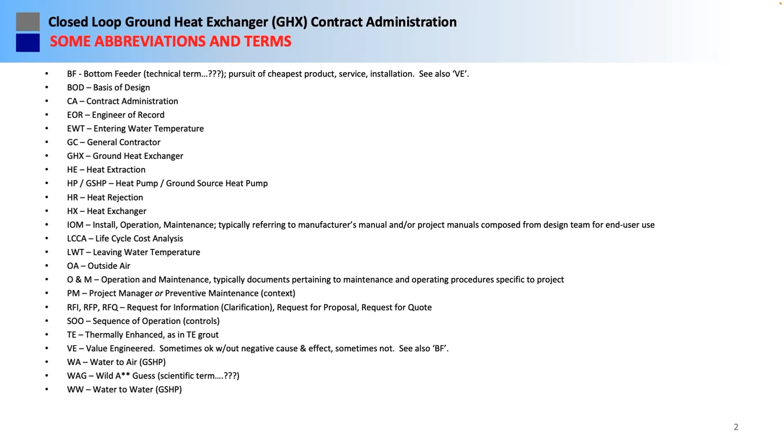So contract administration, what is it? Well, it's really quality assurance to make sure that what is designed goes in as intended. What we've found in the industry, especially as ground source is growing, especially on commercial projects, we have a lot of situations that become problematic that could have been avoided.

By some on-site quality assurance or contract administration by the person who designed the system to begin with. So a couple of key points: CA, make sure that the design, the basis of design, is honored. The industry standards for the construction methods and procedures are adhered to. Quality control procedures are followed to verify system integrity, and that includes things like pressure testing, verifying things have been purged of air, that sort of thing. And the quality of the construction documentation, that is the plans and specs, is really the key for this, and it's also the benchmark for future reference needs, should someone need to get in and put in a utility or something over a loop field.

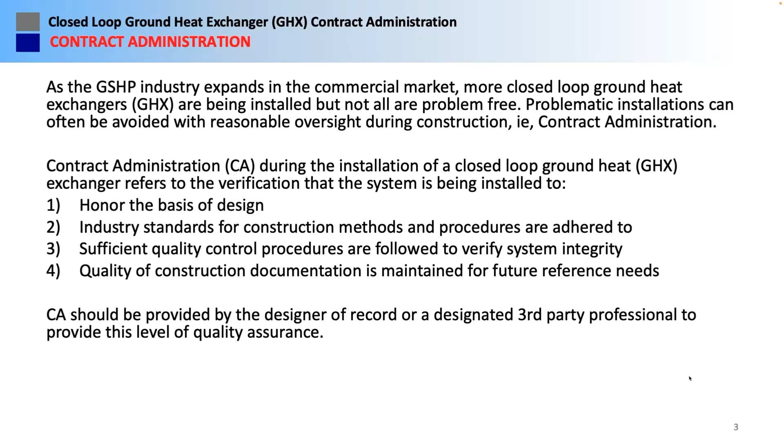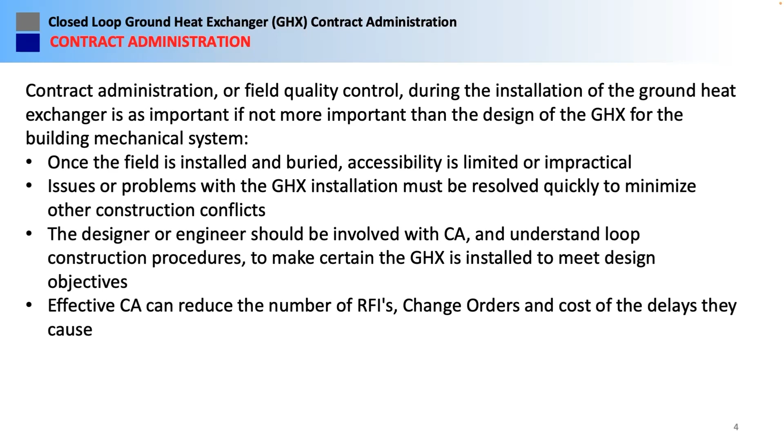So once the field is installed and buried, you're not going to get to it again. CA allows for problems to be resolved quickly during construction, to not compete with other projects or other processes and slow them down. And finally, what effective contract administration can do is reduce the number of requests for information, change orders, and delay in construction.

Just some learning objectives, I'll let you guys just read through those real quickly, and I'll just kind of highlight some things here. It really is part of the design and construction process. It's where design meets construction, and makes sure that things are what is expected for the installation. Also, CA gets the designer involved with the construction team personally, so direct communications become easier. A lot of times people start installing a system, they never know who designed it, and it's some disembodied entity out there, and that human contact is lost. Accordingly, that communication can be bad, or lack of communication can hurt the project.

One of the things that I'm pretty adamant about is doing a pre-construction meeting with all the parties involved to make sure everyone understands things, that we go over the submittals, everyone's on the same page.

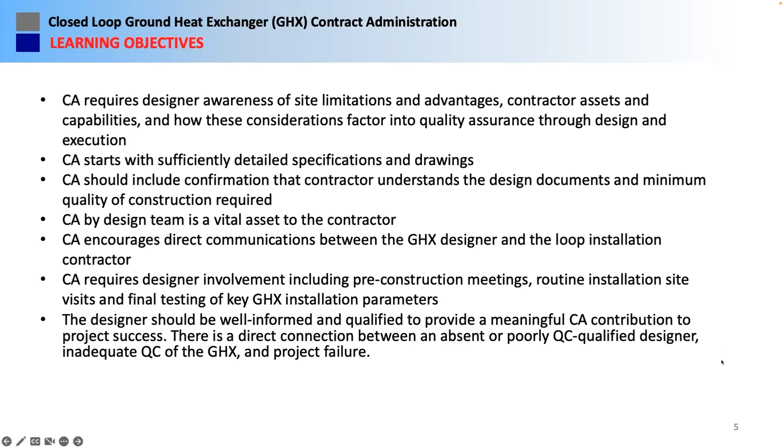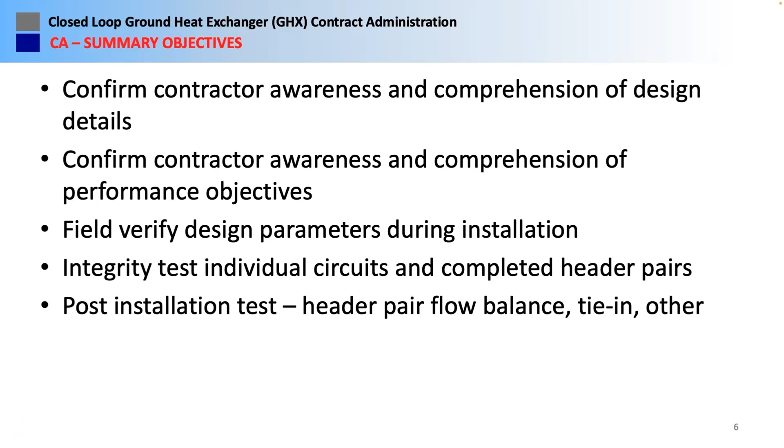CA objectives: confirm contractor awareness and comprehension of design details, confirm contractor awareness and comprehension of the performance we're expecting out of the system, verify design parameters are followed and understood. We really stress integrity testing of the system, and we'll also want to do post-installation tests such as header pair flow balance tie-in and communication with the above ground part of the system.

So the next slide, that's the ultimate objective of contract administration. We don't want train wrecks.

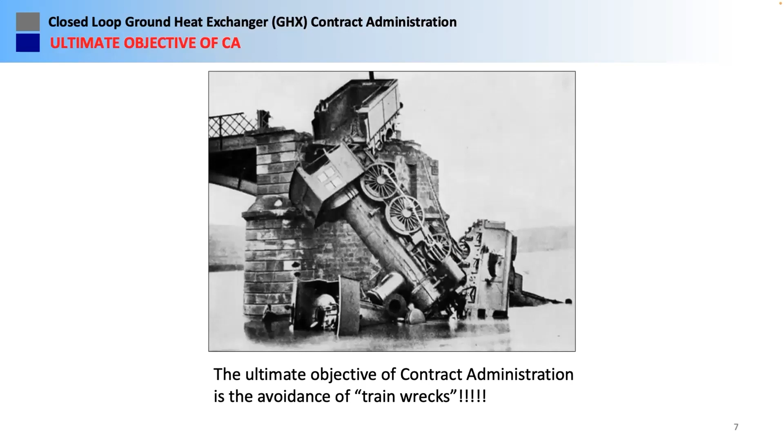So closed loop heat exchangers, what kind are there? Well, there's surface water heat exchangers, which can be a polyethylene coiled loop field or a stainless steel plate heat exchanger. That's one type of closed loop system.

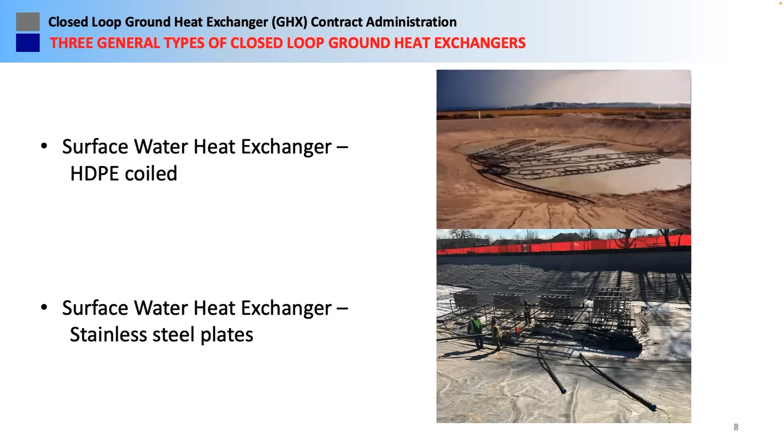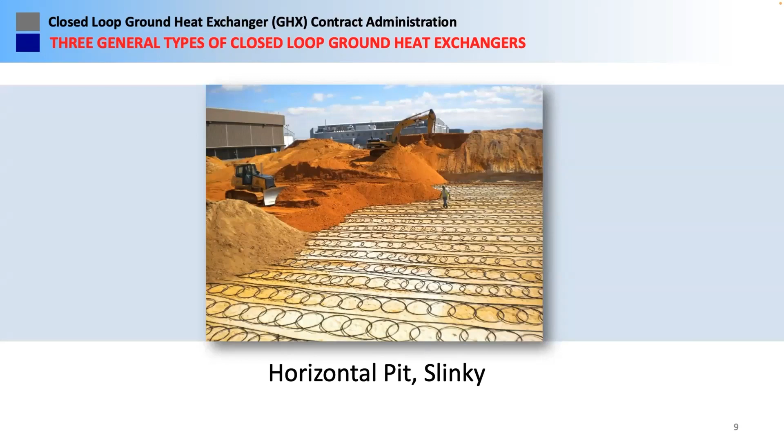A horizontal can be a straight line ground loop or a slinky excavated pit. And you can also do a horizontal trench system.

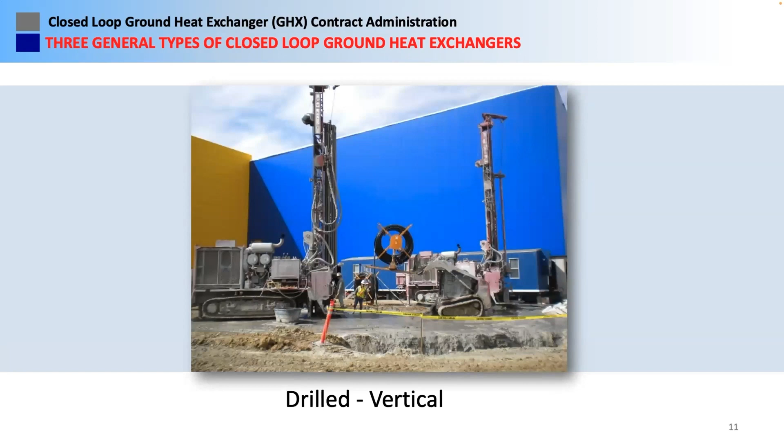And finally, vertical, which is probably the most common, particularly for commercial.

We do the occasional, as an industry, horizontally drilled ground loops. They sometimes are the best tool in the toolbox for sites where, for whatever reason, you can't drill a vertical loop, you can't do a big excavated pit system. So it's just another tool in the toolbox to get the job done.

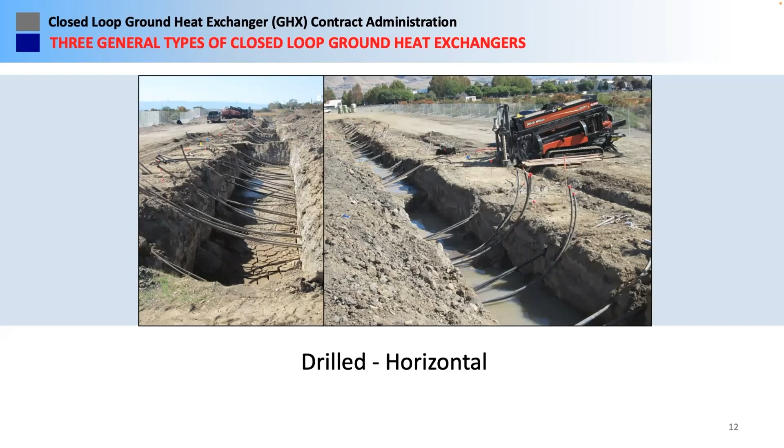And due to the time constraints, we're going to focus on vertical loops, but some of the things we're going to cover apply to other types of closed loop heat exchanger systems.

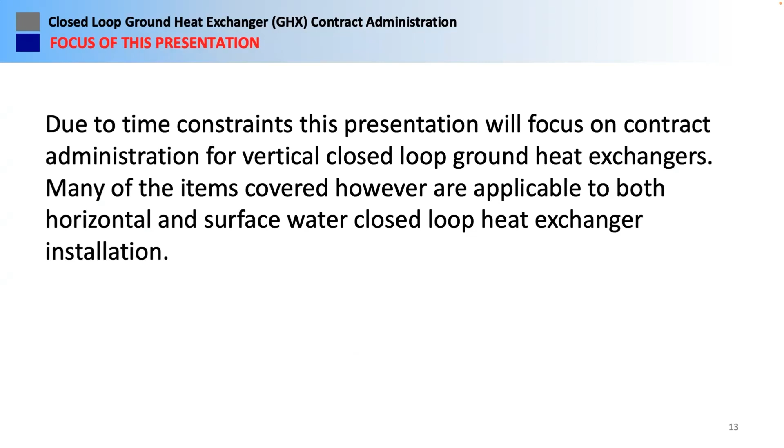So where does CA start? Starts with the design. As a designer, you need to be aware of what contractor assets can do. You don't want to design a system that can't be done. You've got to honor presiding regulatory requirements. Your drawings and specifications have to be sufficiently detailed that people can understand them and execute them. They're also a benchmark for later quality assurance during the installation.

Specifications and worksheets are necessary for good as-built documentation: drill logs, grout testing, progress testing schedule, etc. These all go into the job book, and one thing it does for the contractor, if he does all of these things, it also protects him from a liability standpoint. For example, if there's a problem later, did you do this? Well, yeah, if you've got documentation, that helps you out.

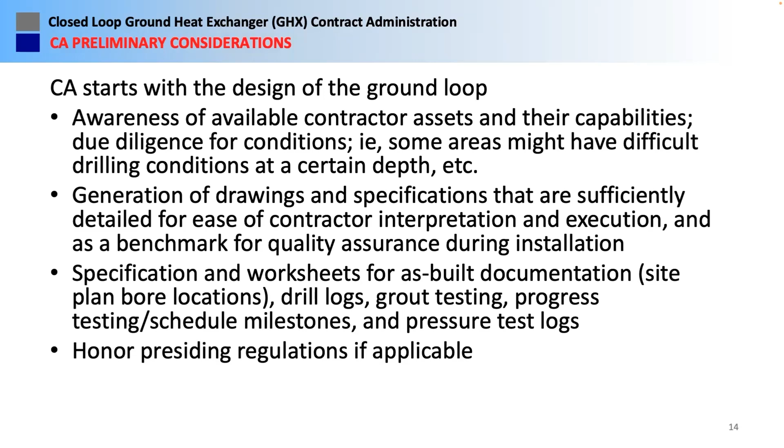So this is just kind of some of the variables that have to be considered during design, and it also flows into your contract administration. So while things are not really complex, there's a lot of components that have to come together to do your design and then execute your drawings and specifications for CA later on.

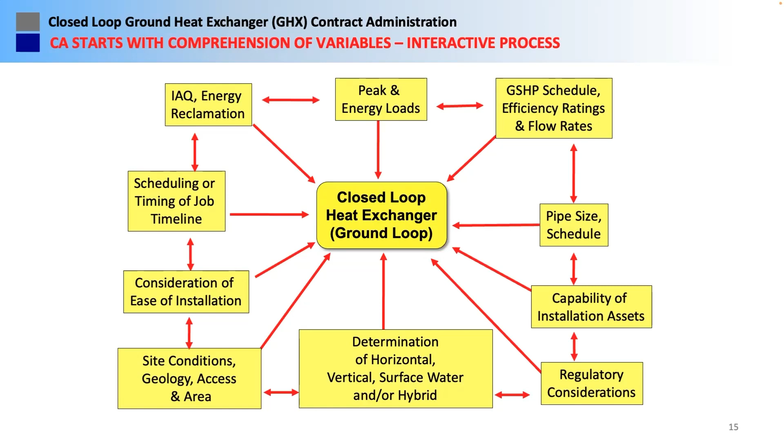Pre-construction meeting, that's where everything starts off. This is after you've done the submittal review. You look over your pipe, fittings, warranties, the grout type, verify licensing, certifications, fusion endorsements, that sort of thing. Go over the type of testing and integrity requirements such as purging, water treatment, that sort of thing.

I don't know, Jeff, if you can click on that submittal checklist, if that'll pop up or not. If it doesn't, I'll be more than happy to share that later. But yeah, what I've done, yeah, no, won't work. Yeah, we won't worry about it. What it is, I've...

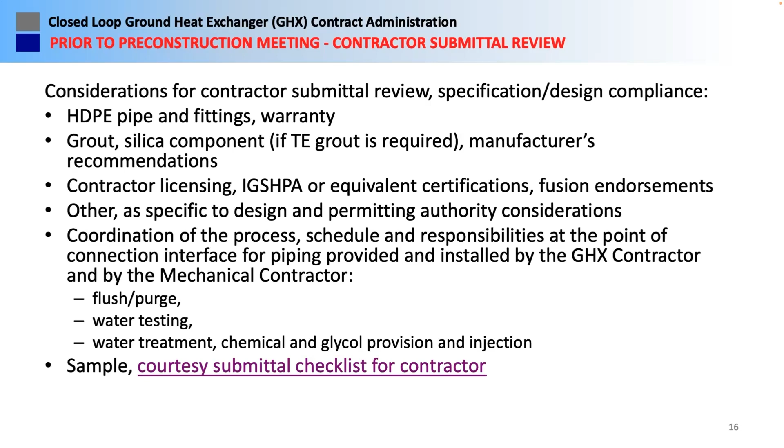Provided a checklist that reflects for most projects the submittals that we want to see and review, and it goes through everything from components such as pipe and grout to we want to see what kind of performance the purge pump the contractor has to make sure he can purge the system of air after it's completed and whatnot. So it's a little more detailed than most people deal with, but as I've had a lot of contractors tell me later, that was a pain in the butt to do, but it really protected us and we got our retainage back sooner. So there was a good reason for that. Let's go forward.

Pre-construction meeting - we review the design, go through the drawings and specs. By this time, we've done the submittal review and everything should be kosher.

One of the things we do as well is confirm contractor responsibilities. A lot of projects I've been on as a third-party peer review, no one knew who was going to do the purging of the ground loop and who was going to make sure the building wasn't going to contaminate the ground loop with air later.

So we go over those kinds of things - what expectations we have for record keeping. The other thing is, you as a designer may not know everything you think you do. I always encourage the contractor, hey, if you guys have got a better way of doing things, let's hear about it. A lot of times you learn things you never thought of because people have been doing this a long time and can really improve the job. Sometimes they make a suggestion that doesn't make sense because it might hurt some part of the job elsewhere, but that's fine - you want that open communication.

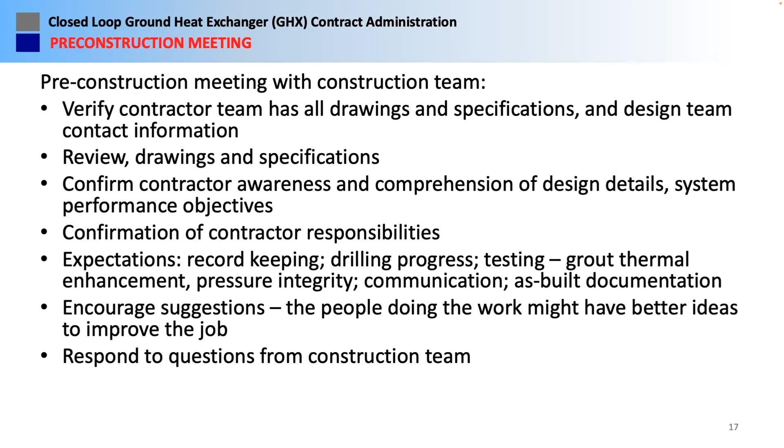And finally, you're going to have a lot of Q&A between the construction team and the designer and get everyone on the same page.

Means and methods - this is a problem I've had with a lot of engineers and designers that put out systems where the specifications and drawings are so minimal, and when asked, they'll say, well, that's means and methods.

I'll give you an example. If you're the designer and you don't know how to design a reducing manifold and cannot calculate the minimum purging rate and pressure drop, how are you going to know if that ground loop header pair is going to be cleaned out of air? So as a designer, it's your responsibility to know those things and post that information in your specifications and drawings.

The other thing it does is let the contractor know that you understand the construction process on these things. So yeah, just don't leave everything to means and methods.

Sometimes if you know the contractor - hey, I don't have to be that detailed, this guy's got his act together, don't have a problem. Or you might have a situation where you've never worked with this guy before, so you better make sure you've got your I's dotted, your T's crossed. So means and methods - yeah, there's a lot of things you can't cover in drawings and specs, but the key parts you really need to understand and have calculated beforehand.

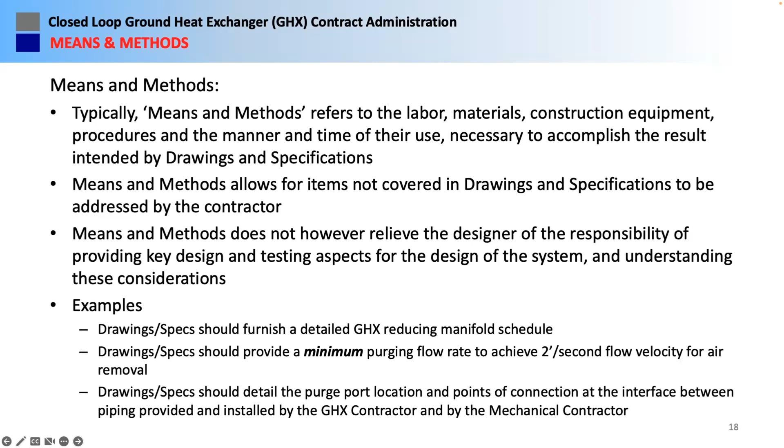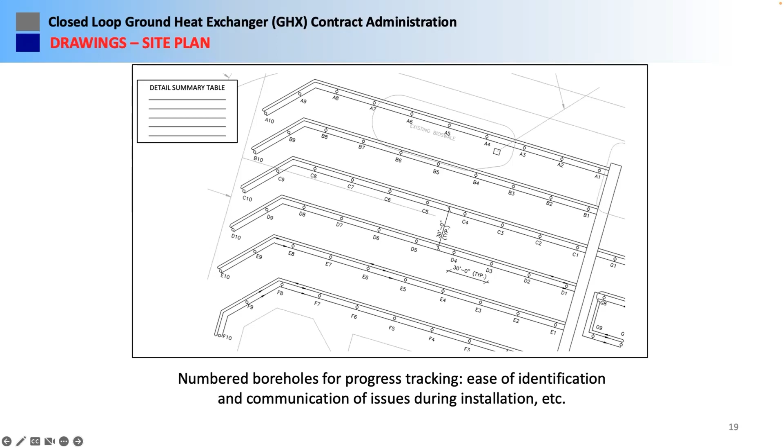One of the things I like to do is assign a discrete header pair letter and number for coordination for each borehole. For example, let's say a borehole that the driller runs into something he can't complete - so what are you going to do? If you're on the phone with these guys remotely and you just say it's a borehole in the middle of the field - well, which borehole? A discrete number allows that communication to save a lot of time. I can't believe how many big projects I've seen where there's no nomenclature on these sorts of things, so just a word to the wise, something to keep in mind.

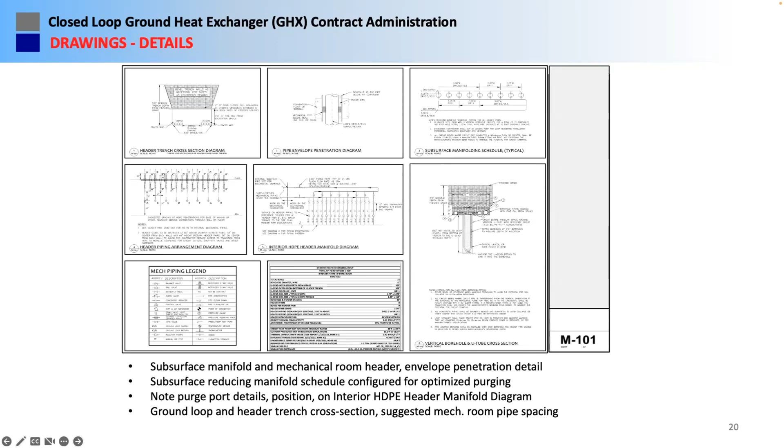I usually post a detail sheet to go along with the site plan, and we'll go over these details in the succeeding slides. In my designs, it'll go all the way from the design of the ground loop all the way into the mechanical room, where we'll have the manifold configuration in detail, including everything like isolation valves and that sort of thing. Next, please.

One of the things I put on is a summary table on both the site plan and the detail sheet - this is an example of a recent project. At a glance, it gives you size and scope of the field, pipe sizes and dimensions, what we expect for grout thermal conductivity. We have a little additional information, not really for installation but just for reference - for example, what was the basis of design for entering water temperature for the ground loop? In this case, towards the bottom, you can see it's 85 degrees to 35 degrees - that was our basis of design for the ground loop field.

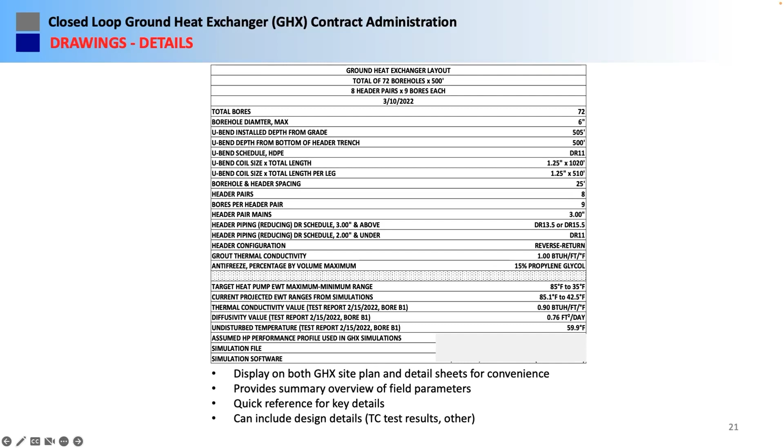We'll do a header trench detail that's typical for any number of header pairs in any trench. You'll notice reference to tracer wire, that sort of thing. If we're going to cross a water utility, we may want insulation board between the header pairs and the rest of the fill. It just depends on the project. Next, please.

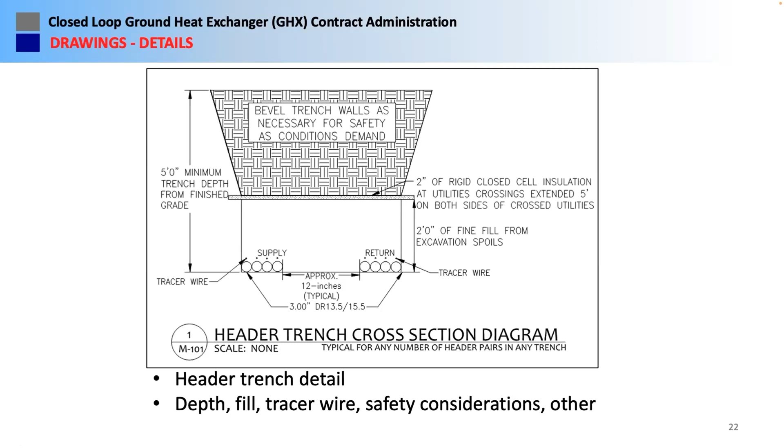We'll do a penetration detail. I like to use a positive seal, link seal or equivalent. We just don't want critters, moisture, and contamination coming from outside into the mechanical room.

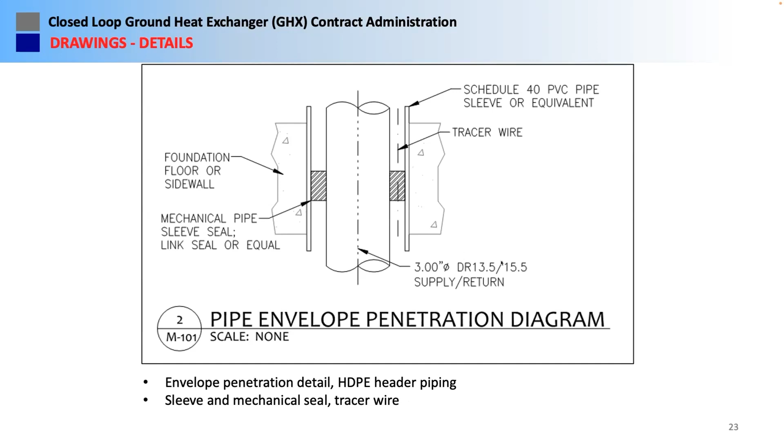This is a big deal to me. I talk with a lot of mechanical engineers that design commercial ground loops, and a lot of them do not understand how to design a reducing manifold. If you don't do that, you could actually triple or quadruple the amount of flow rate and commensurately a higher pressure drop just to clean the air out of the system. So I work these out in detail on all projects to make sure that we require the least amount of purging effort to clean these systems out.

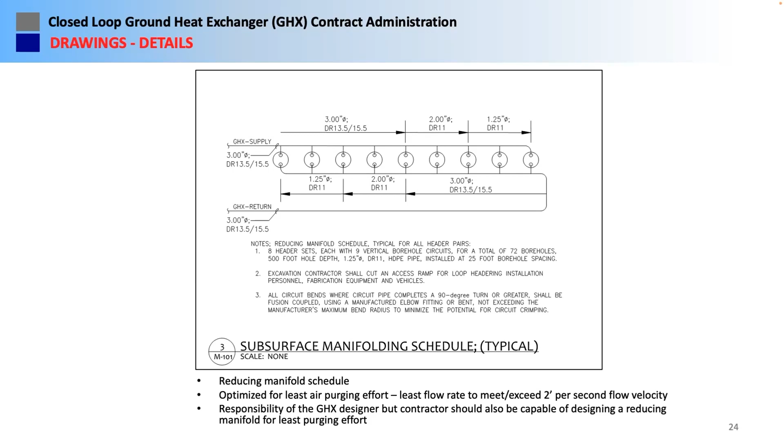We'll do a suggested spacing in the mechanical room for your header pairs. We don't stick to this as a hard and fast rule, but the objective is to make sure there's enough room to do service connections later once you bring in all your header piping.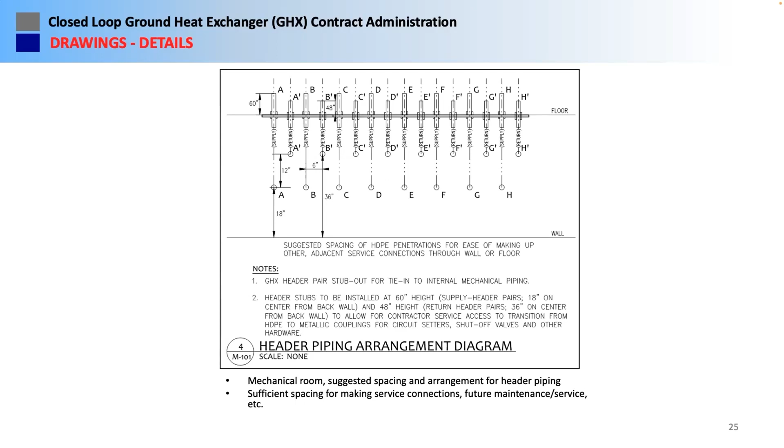A lot of people say, oh, we've got circuit setters, we don't need an isolation valve there. Well, circuit setters don't normally close all the way. The other thing is, when you're speccing your circuit setters, you want to make sure that when they're open, they're full flow and not restrictive, because a lot of circuit setters are not designed to open fully. So if you've got like a 3-inch header pair spec and you want a 3-inch opening for purging, that circuit setter may inhibit your purging efforts.

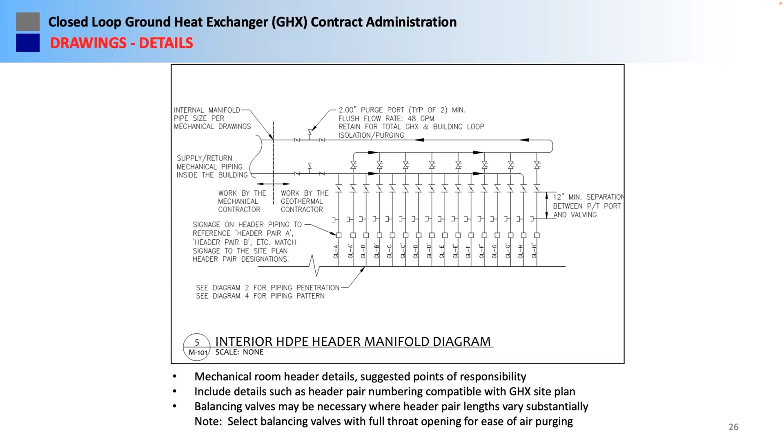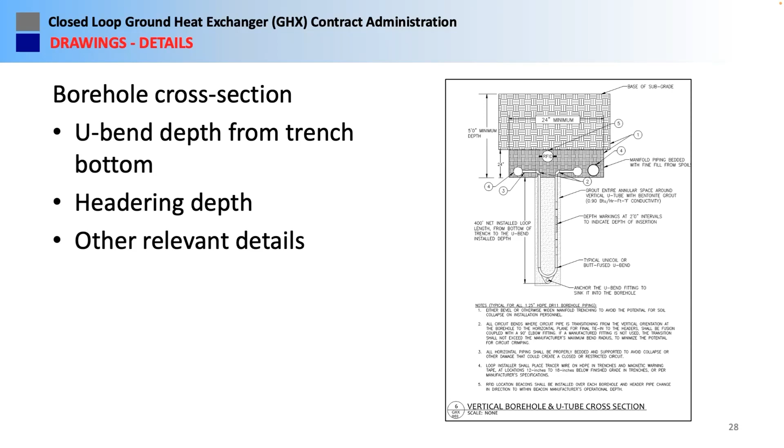A borehole cross section. You'll also notice we've gone to specifying RFID beacons to supplement tracer wire and locate tape, because we found that over time tracer wire sometimes breaks down for whatever reason, or it gets cut accidentally. The RFID beacons, we typically have those GPSed as well with a discrete serial number on each beacon. It can really help later on when memories fade to locate these things.

Next, please. Excuse me.

The other thing is, we like to see materials properly staged during CA. We like to see the borehole surveyed, and we like to watch how product is handled, and we want to keep the inside of the pipe clean, of course. We want to make sure grouting is done immediately upon getting to total depth on the borehole and the loop is loaded. We don't want to wait. I see a lot of drillers sometimes - I've actually had this happen where the guys will drill holes and then later, 3 days later, go in and put in the pipe and then grout, and then they wonder why they've got bridge offs.

Really want to watch fusion work. I've got a lot of bad examples, unfortunately, of people not doing their fusion correctly. Routine temperature checks of fusion equipment, and make sure things are kept clean in the field.

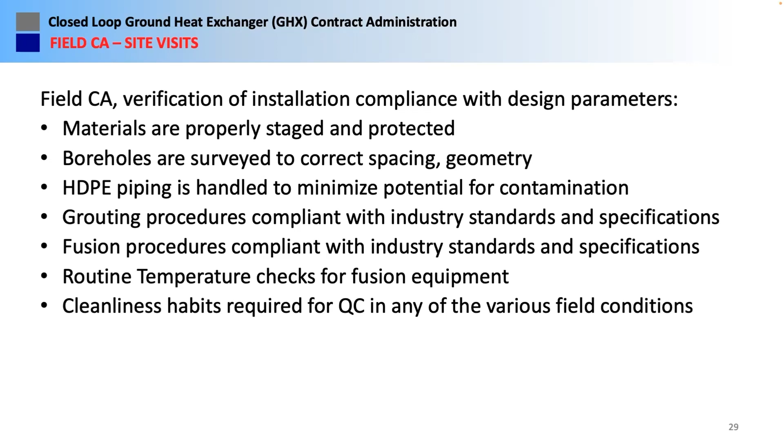Just an example of observations: proper staging of product, both grout and pipe. Next, please.

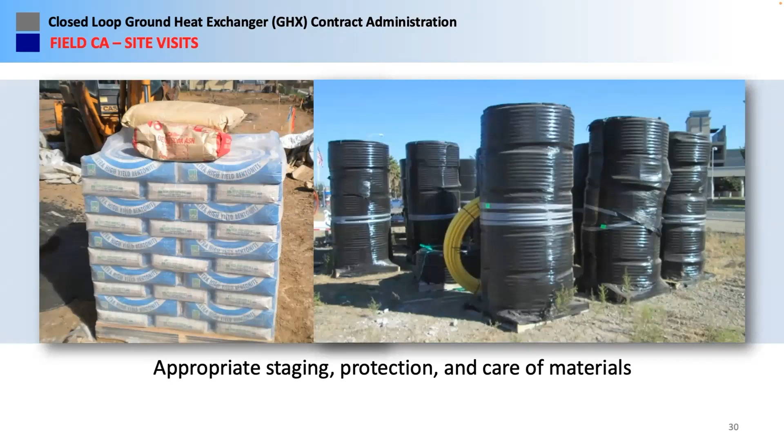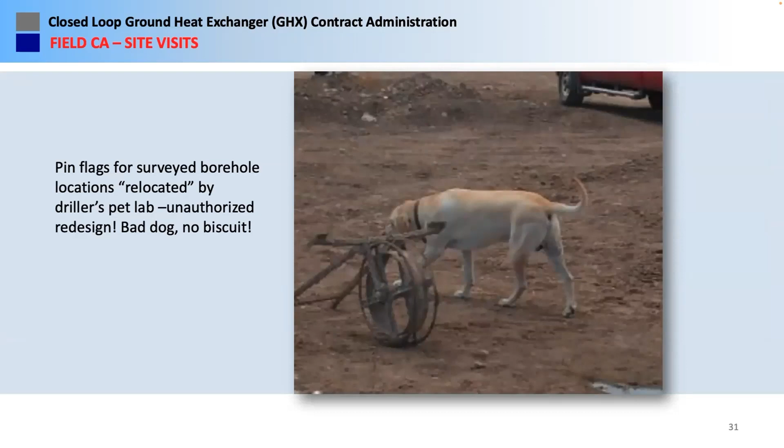I had one job in Wyoming on a school, and all of a sudden the pin flags were disappearing for the hole locations. The driller's pet lab was retrieving the pin flags, so we had to resurvey some. Bad dog, no biscuit.

Especially in urban environments, we like to see either fusion caps or have the pipes fusion crimped to avoid contamination at the job site. I've had on some urban projects kids get into a field and stuff down a pipe. Why? I don't know why kids do what they do, but they do it anyway. So this gives you a little extra protection.

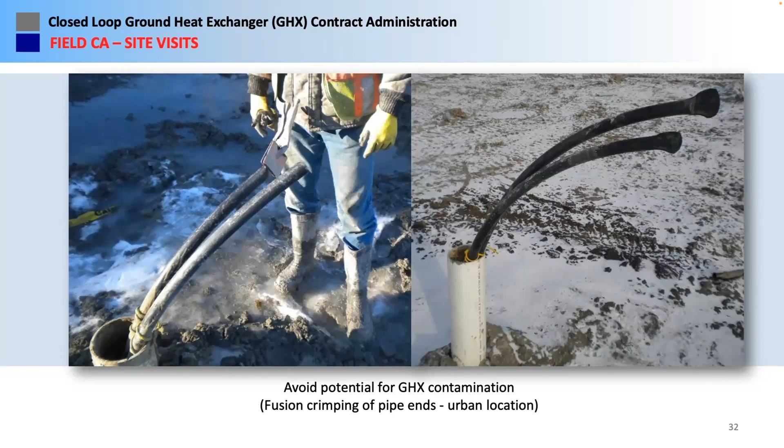I was on a project and I saw a lot of ends of polyethylene pipe laying around. What I found was it was a new driller. He wasn't getting to total depth on every hole, so his guys were just cutting off the pipe and calling it good. Not a good thing. So be observant when you're out doing your CA visits.

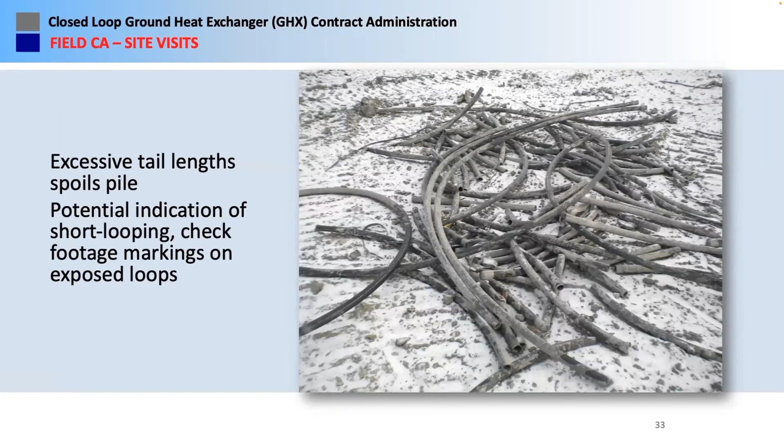This is one reason we specify pipe that is designed for ground loop installations that'll have 2-foot markings, so we can verify that if we didn't see the ground loop being loaded, we can verify depth of placement of the U-bend by the footage markers.

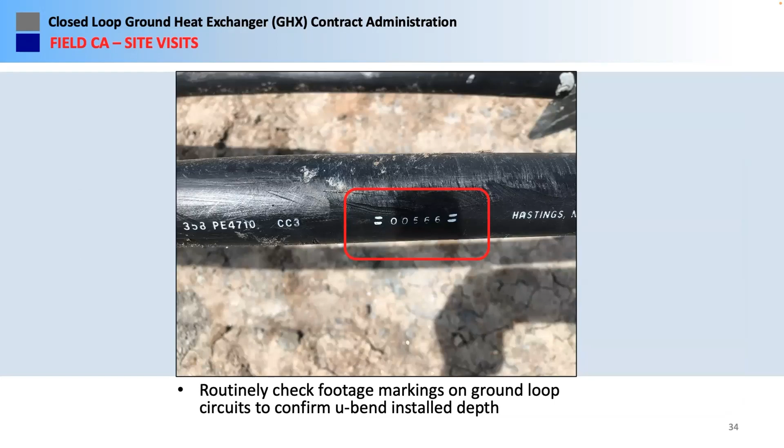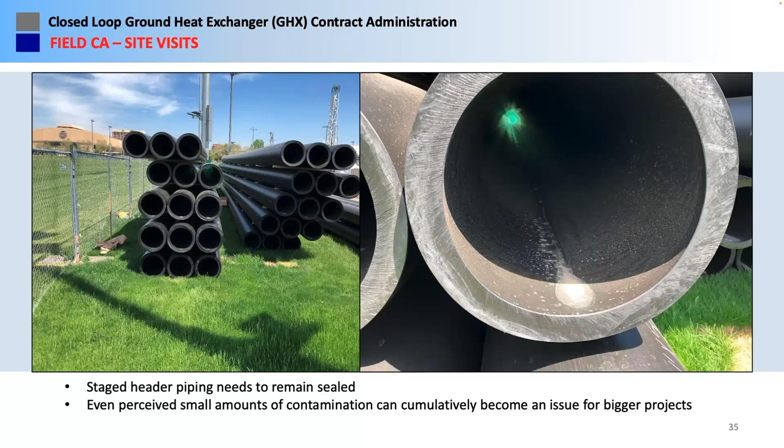Even staging of header piping. On this project, I did not like that the header piping was unsealed. Even though it's just a little bit of dust and whatnot, that stuff tends to accumulate over time. So we're pretty anal about making sure that people keep the inside of even their header piping clean and capped on a project site. It's one of these things that, well, it's just a little bit, but if every pipe has that, it becomes a lot. So people need to give a little more attention to detail in protecting the product.

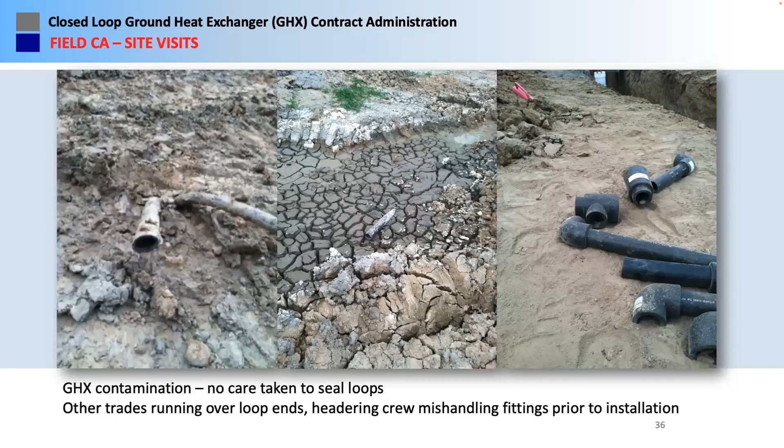And same driller never learned his lesson.

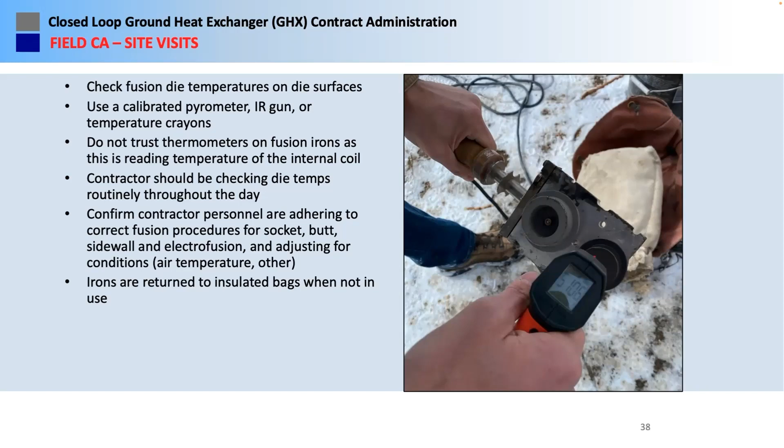Bring your infrared gun when fusion is occurring, and keep something handy like an ISCO fusion reference guide. In fact, I like to see the contractor have those in the field, so they're handy. ISCO and others give those away for free, so pretty handy stuff. Checking die temperature should be routine, not just in the morning, but like every other fusion joint, because a lot of times guys will rely on the thermometer gauge on the fusion die, but that's not the actual temperature of the die, so they need to check that with a temperature crayon or an IR gun or equivalent.

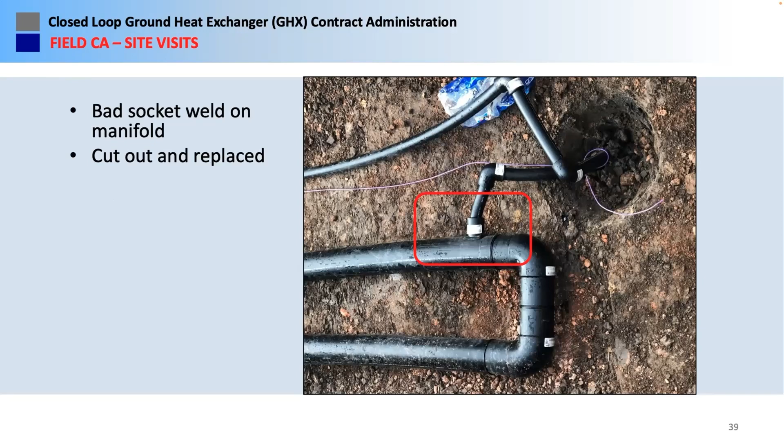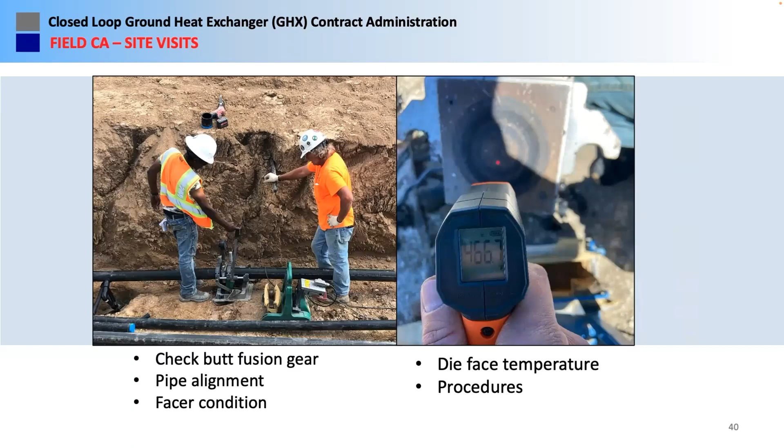This was on a project that we had designed for 600-foot bores, and while walking around, I noticed his tremie line didn't seem to have a lot of tremie line left on the reel. In fact, you could see the core of the drum. There just wasn't very much line, so the driller was not actually grouting from bottom up, and that was not only contrary to spec, it was contrary to state law on this project. So that had to be corrected.

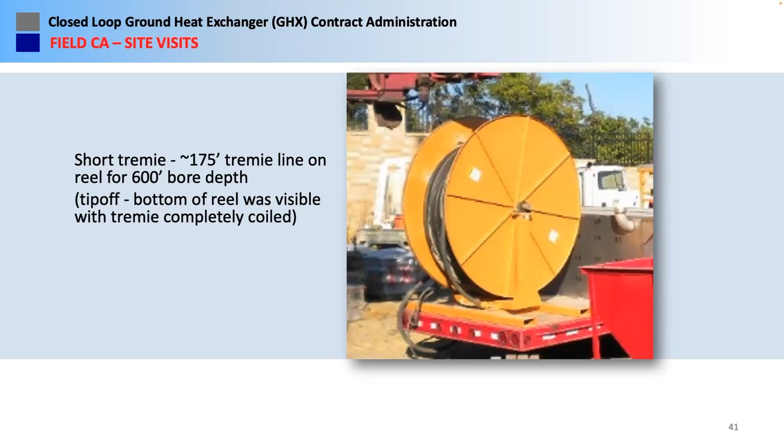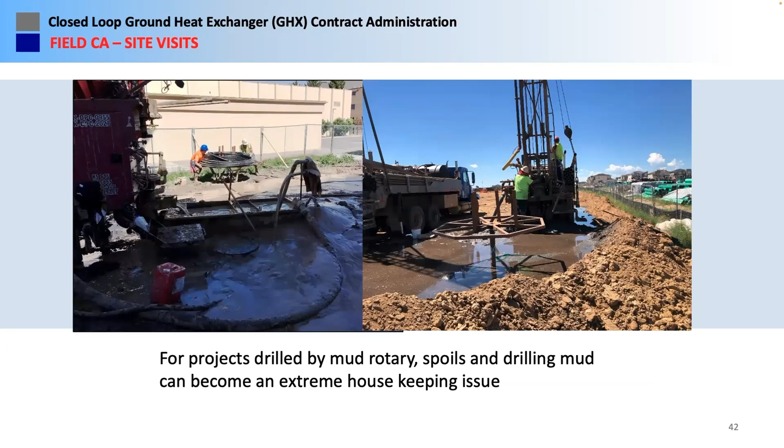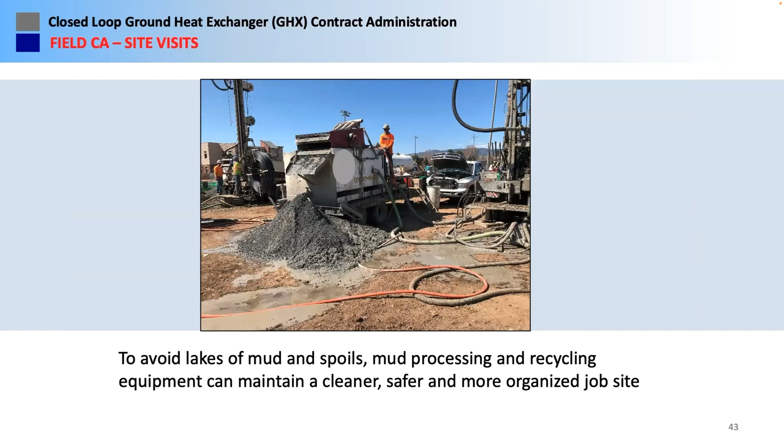For a lot of projects, I always like to ask the driller if they have a mud recycling device to use, either of their own manufacture or a pre-manufactured device like a Tibban Mud Puppy or equivalent. It's a lot easier to keep a site clean.

One of the other things for CA is maintaining logs of progress of the project, flow and pressure testing, that sort of thing.

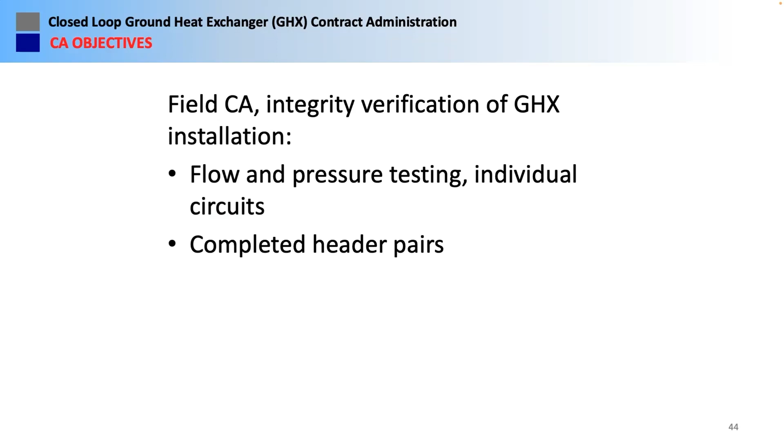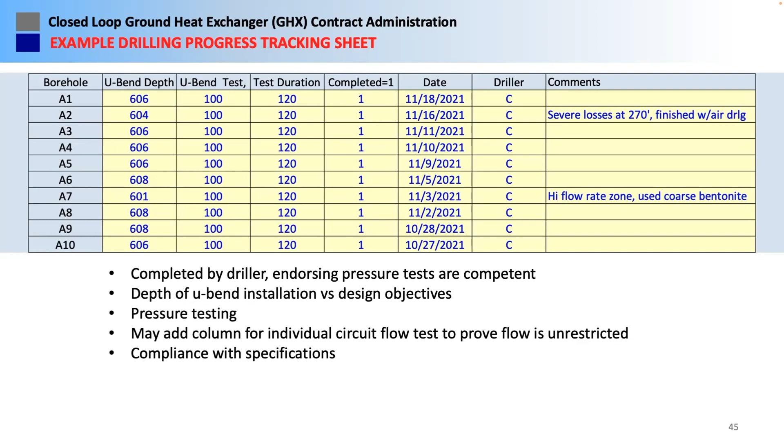It also puts the liability on the driller. If he says he got the U-bend to the design depth and he's filling that out, but we find later from footage markings on the pipe that it's not correct, then we know we have an issue and need to go back and address that.

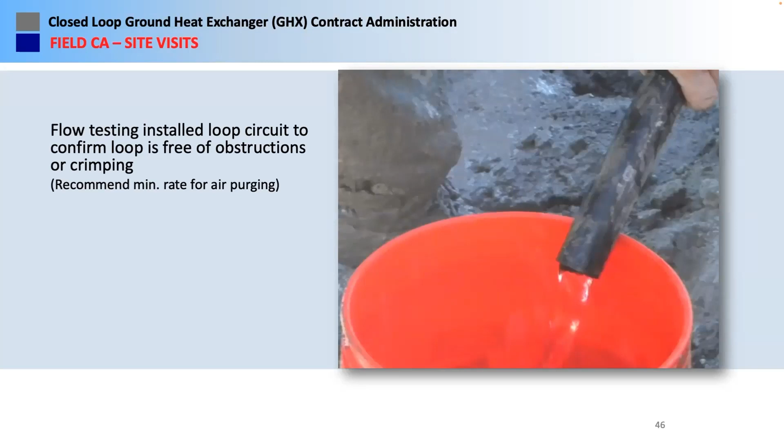If there's any question of obstructions in the pipe, we will ask for a flow test on the circuit before it's headered up, typically at the minimum purge rate, to make sure we don't have an obstruction in the pipe.

This does get into means and methods a bit, but we recommend to the driller to pressure test your pipe before you load it and after it. That way you log that, because if there's a header pair that won't maintain integrity later during testing, you can go back to your logs and say, okay, we're probably safe with the circuit pipe, so the issue is somewhere in our headering.

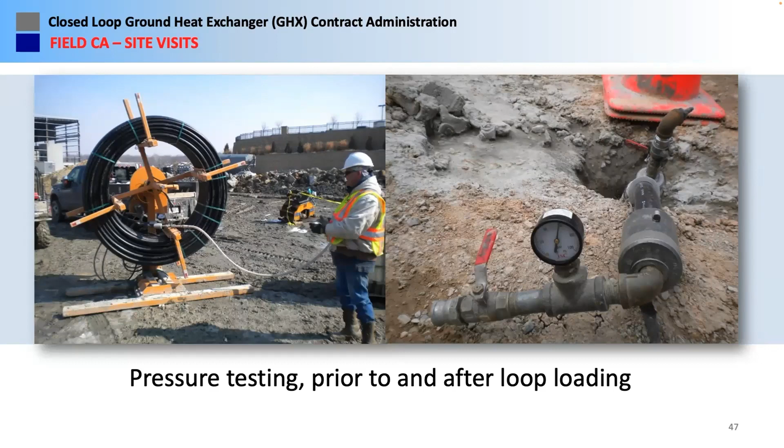Testing of grout thermal conductivity is getting to be a big deal, especially if the host geology has good conductivity. You want to take advantage of that and not slow down heat transfer with grout thermal performance that's not reasonable for the loads and the host geology, to get the most out of your loop system.

So we like to see that grout test pretty frequently on jobs. Frequency can depend on the first couple of tests, to make sure the grout is being blended and tested correctly. One problem I have with a lot of drillers is they'll take a grout sample and not get it sent in immediately. On a smaller job, say 20 or 30 holes, that can go pretty quick. So especially on the first borehole, we like that first grout sample to go in immediately and have it tested.

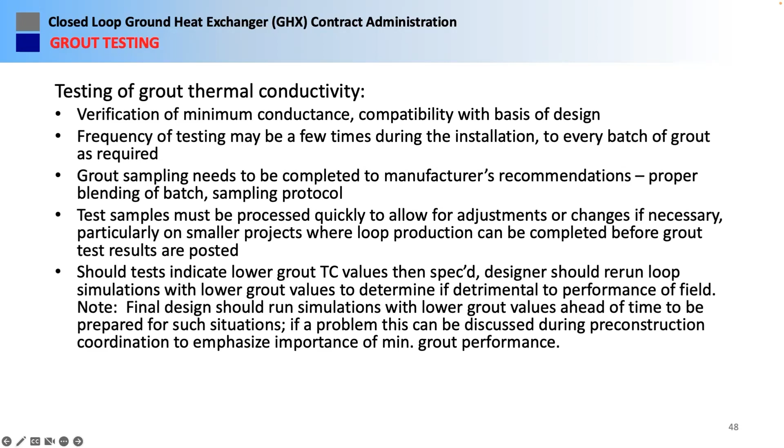I maintain a grout thermal conductivity log on projects. I found this very helpful for judging whether we have a problem with the grout. On these bigger projects, grout performance can have a big impact on the performance of that ground loop long term, so we like to keep an eye on this.

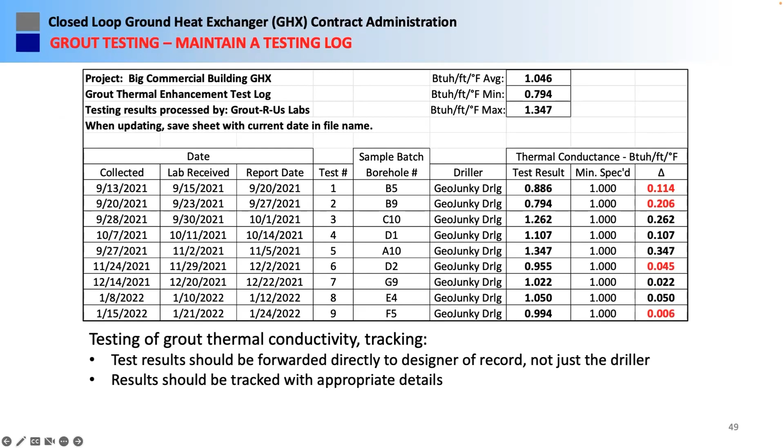Of course, we like to see the header pairs pressure tested and properly purged.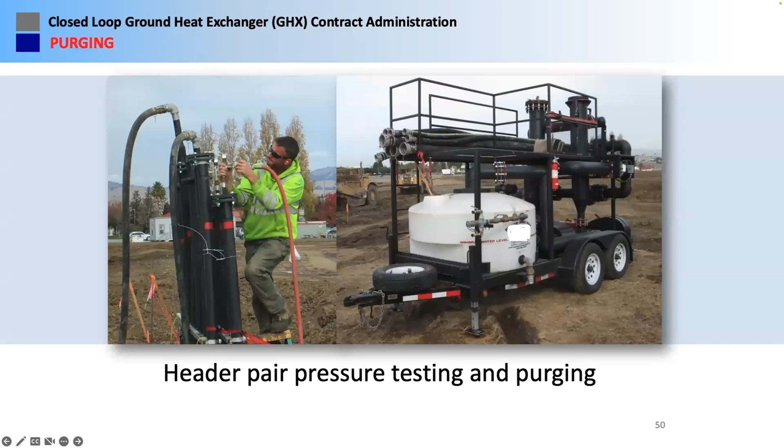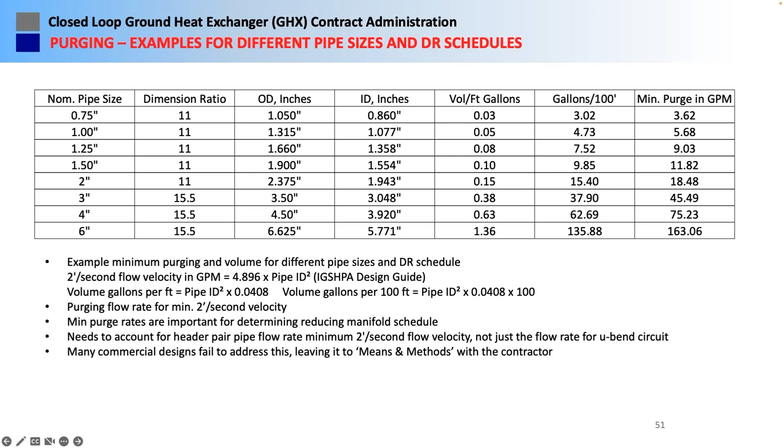This is just a marker here on the presentation to show you the different minimum purge rates for different pipe sizes and dimension ratios. You can get this out of the IGSHPA Design Guide and put together your own spreadsheets for that. In fact, it's noted on the slide here how to determine the 2 feet per second minimum fluid flow velocity in gallons per minute, right out of the IGSHPA Design Guide.

This is an example, an extreme example of a misdesigned reducing manifold. The first problem is it's got 40 holes on one header pair. This is from an actual job that we did—it was actually a construction defect litigation issue. When we calculated the minimum flow rate, the way the 40-circuit header pair had been laid out needed 473 gallons per minute to purge. Had they done the proper reducing manifold schedule, that could have been reduced to 362 gallons per minute. So design of your reducing manifold schedule is important.

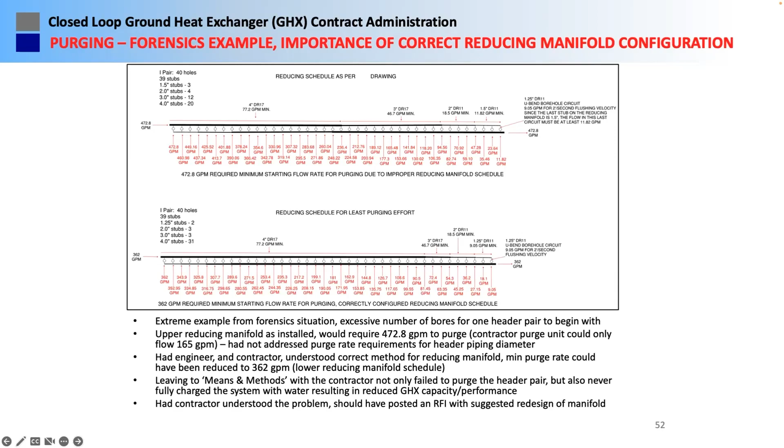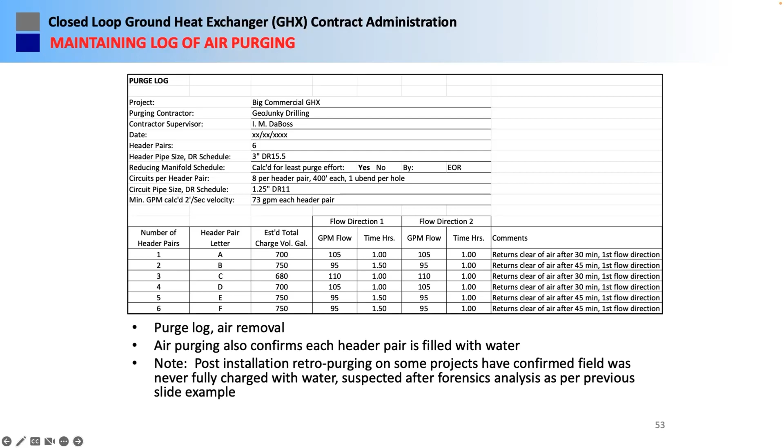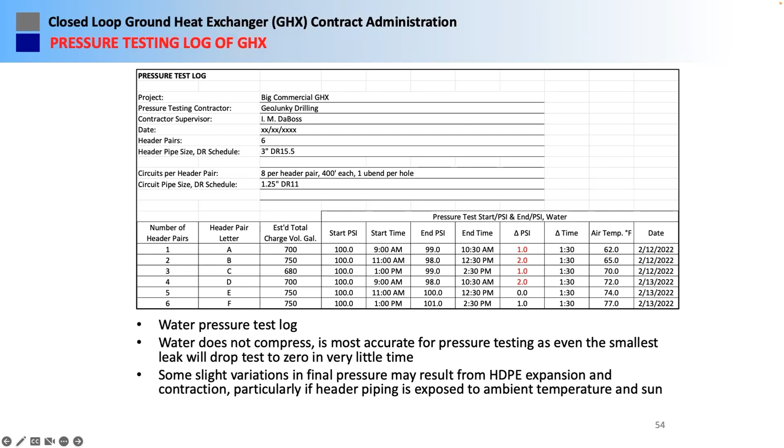And then, of course, pressure testing. If we have to, we'll go to the ASTM test, but typically a simple hydrostatic test using water. We do expect, from initial pressurization, that polyethylene expands a little bit. So if it's not more than 3 or 4%, you're usually pretty good.

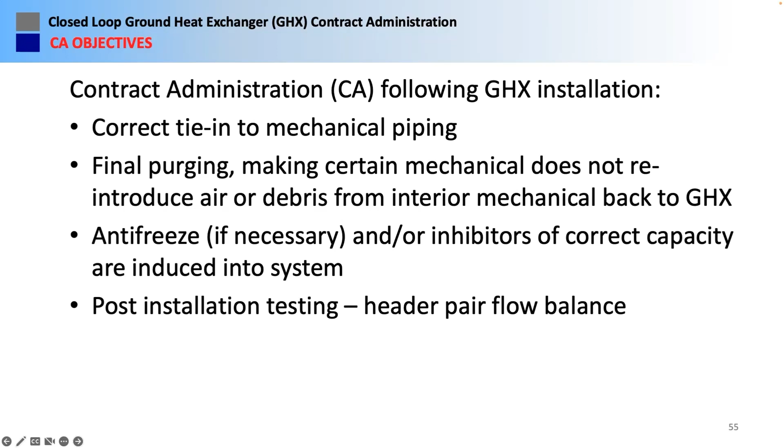Following the installation of the ground loop, you can take this a step further, tie into mechanical piping in the building, final purging. One of the big problems we have is the mechanical doesn't purge his system out of either air or debris. And guess what? When you put that in communication with the ground loop, now you have the gift that keeps on giving for a while. We've also had issues where someone wanted the driller to put in his antifreeze, and then the mechanical put in his version of antifreeze later. They were not on the same page, and we had a conflict chemically. We've had that happen. And then post-installation testing, header pair flow balance if necessary.

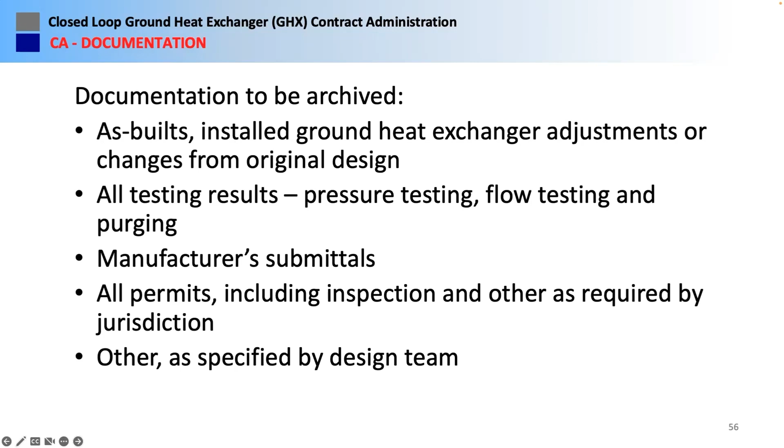Documentation—we're real big on making sure we've got good as-builts. We log all testing results. We want all the manufacturer submittals, particularly pipe warranty, that sort of thing. We want to make sure all the permits and legal documentation is retained, and if there's anything else specific to the project that the design team wants.

So CA does provide value. Usually you can resolve issues faster with good CA, reduce your change orders, and head off unforeseen costs. With all of that documentation, you're going to have a lot higher confidence in the integrity of your system when it's all said and done. And what a lot of contractors have found is that, yeah, it's kind of a pain to go through all this testing and logs, but they usually get their retainage back faster.

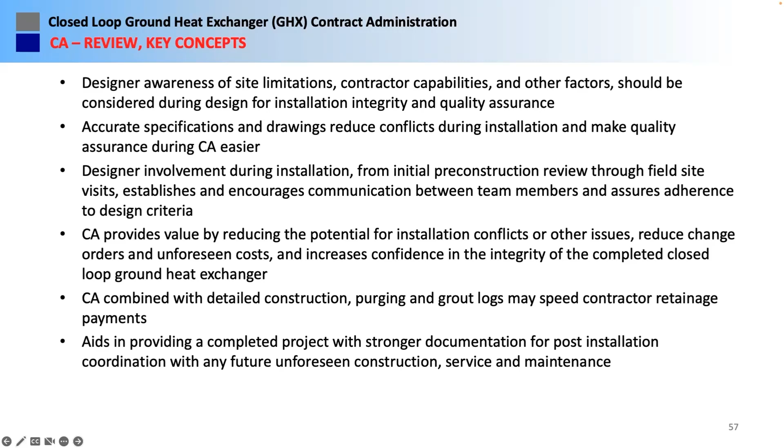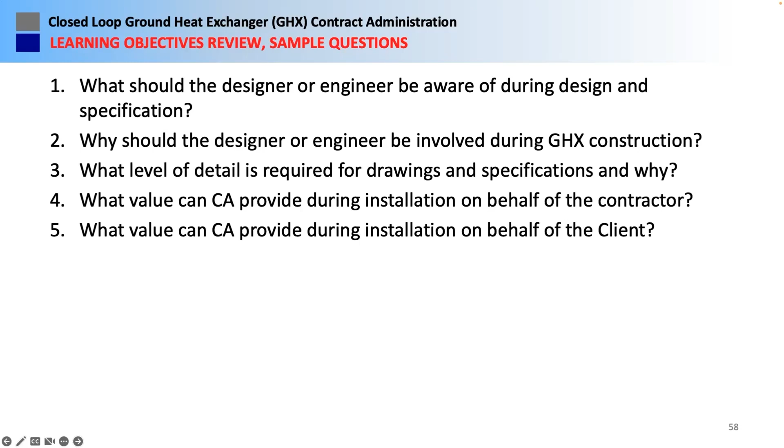And just some sample questions for learning objectives, if this is something you want to consider: What should the designer engineer be aware of during design and specification? Why should the designer engineer be involved during construction? What level of detail is required for drawings and specs? And what's the value of CA to both the contractor and the client?

And finally, parting shot: construction sites can be hazardous, so be safe. That's all I got.

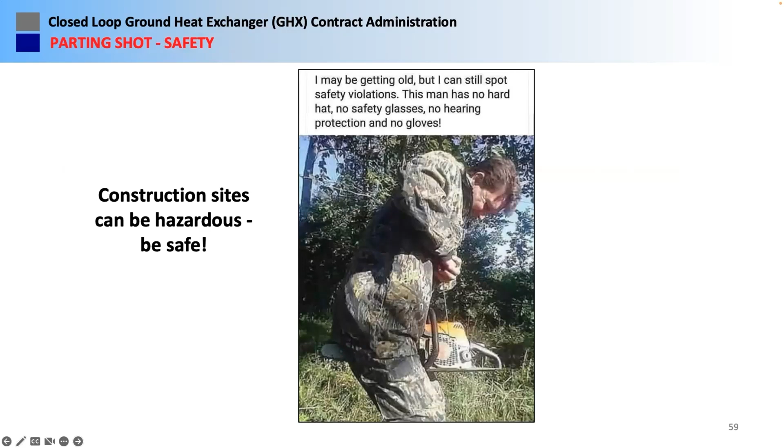All right, thanks so much, Terry. That was a really good discussion, and I think we have some questions coming up. I appreciate you taking the time to put that presentation together.

You bet. John asked the question: isn't the pressure drop of a circuit setter on a manifold counterproductive and added cost with little or no value? Yeah, in fact, I don't spec circuit setters unless we've got really unusually different header piping distances. I have had projects where we put part of the loop field 300 or 400 feet away from other header pairs that are like within 20 feet of the mechanical room, and we have found that we do get different flow rates with that big a difference. But on the other hand, if we're within 10 or 15% of the same header pair distance from the mechanical room to the first borehole in each header pair set, no, I agree, there's no need for a circuit setter at that point.

Okay, thank you, Terry.